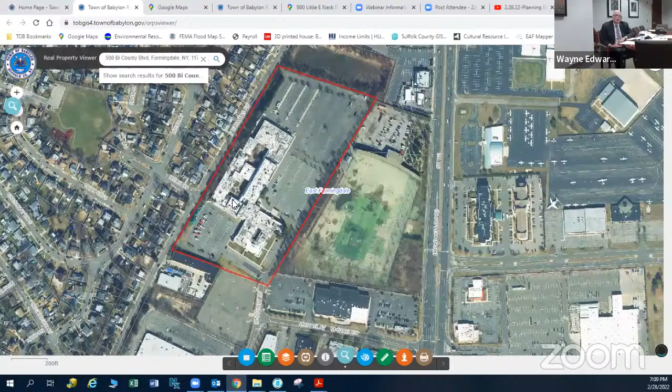Bi-County Boulevard parallels Route 110. Between Route 110 and my client's building is the movie theater, as well as Floor & Decor and several pad sites. On the other side of Route 110 is the Walmart Supercenter and Republic Airport.

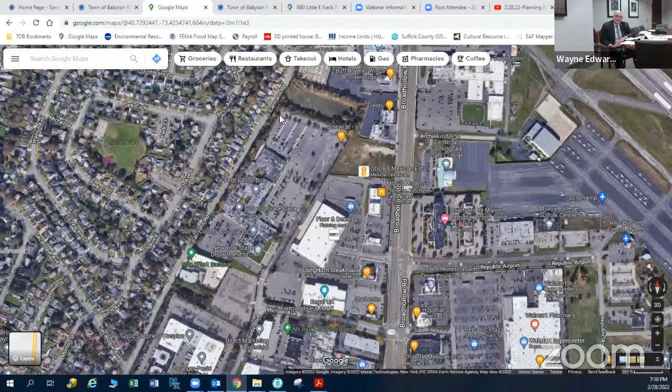As a result, if this board approves that building, there will be no changes to that. There will be no change of entry regarding from Bi-County Boulevard, nor from Carmans Road. The only way you can access Carmans Road from this site are 2 gates. One to the north is a crash gate, and the other to the south is a locked gate, which is locked as a result of the agreement when the Kiddie Academy was granted.

During my client's ownership of the building, it was clearly noticeable that there was a significant number of empty spaces and the building was overparked. My client did a similar project at 999 Stewart Avenue, which is a 200,000 square foot office building.

They built behind it a CubeSmart, similar to what they're applying for here. Across the street was the old Grumman site. It's an industrial area. Across Stewart Avenue from that area is also residential properties.

Currently, my client leases the northeast corner of the building. If you go down there and visit, the New York State Department of Transportation operates the commercial truck licensing test site in the area. The area is fenced off.

If you want to obtain a New York State Class A license to drive a tractor trailer or a larger truck or bus, you have to come to the site and take driving tests. It has to comply with federal regulations as well in order to get a CDL, or commercial driver's license.

Inasmuch as the parking lots are underutilized, and to monetize their investment in the property but not intensify the parking or the traffic on the site or off the site, the best use for this is a self-storage facility.

Site plans were submitted to the Department of Planning. The process started approximately 2020. Plans were reviewed, comments from the planning department were received by my client's consultant, and modifications were made to the plans.

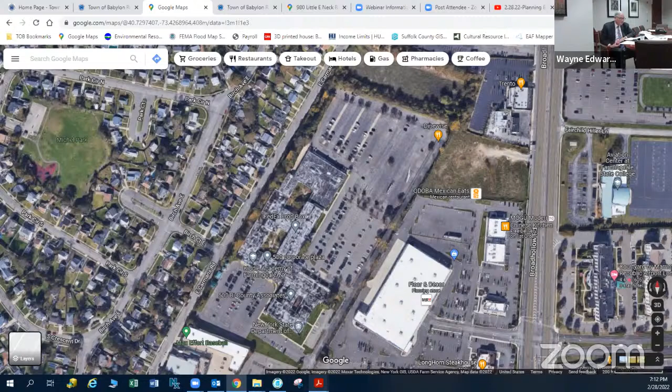Starting with the self-storage facility, it will be a 3-story building set on 2.84 acres. There is no basement, there are no windows, and it's not a 24-hour operation. It will have 20 parking spaces when 58 are required.

Thus, if the board should approve the application, a parking variance will be necessary from the Board of Zoning Appeals of the town. In addition, in the industrial G zone, the height for self-storage is limited to 25 feet and 2 stories. My client is requesting 33.5 feet with projections extending beyond that, to accommodate the bulkhead for stairs and to add architectural details. A height variance and number-of-stories variance will also be required from the Board of Zoning Appeals.

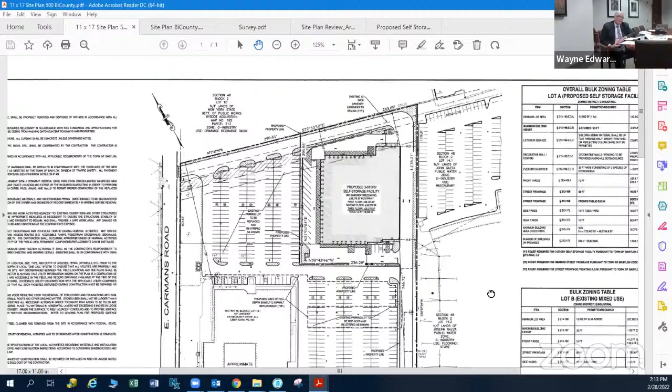As a result of taking parking spaces away from the existing office building, the office building parking spaces will be reduced to 686 spaces when 829 are required. So that will need a parking variance as well.

Cameron has reviewed the parking requirements for each building, and the plans for parking were analyzed for circulation of fire trucks, garbage trucks, and so on. They found that parking was going to be provided for both uses, with adequate parking as well as ADA parking.

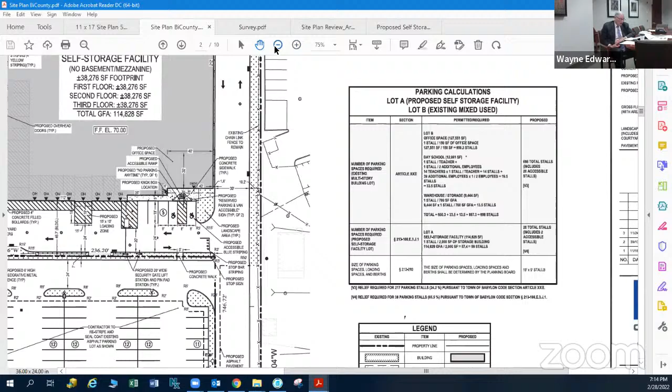Regarding the height variance for the storage building, the highest point will be 42 feet, which is the stair tower in the self-storage building. Self-storage in the G zone is limited to 25 feet, though 35 feet is permitted in the G zone. So if this wasn't a self-storage facility and was just a plain warehouse, we wouldn't be seeking a height variance.

You will note from the renderings that were issued, the town made comments regarding elevations, and my client agreed to provide more architectural detail and change the color. Normally a self-storage building has pretty plain walls; this will look less industrial, and our architect will describe that in more detail.

We have Mr. Frank Ralph, who has testified before this board on many occasions regarding self-storage. He designed the facade and will describe the design of the building as well as the operation of the proposed self-storage facility. After you hear from Mr. Frank Ralph, you'll note that every effort has been made to meet the comments made by the planning department and the town consultants.

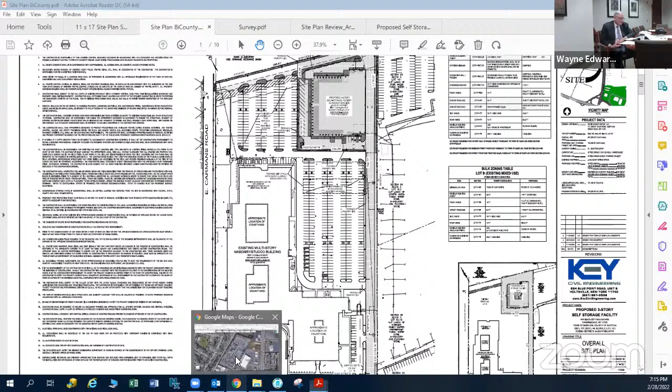We generally don't think of self-storage as an economic generator. These facilities were always thought of as a place where homeowners put extra furniture if they were in between houses, storing their furniture and goods. But actually, most of the users are tradespeople, retail stores, and other entrepreneurs who want to hold equipment, inventory, and display items so they can keep them in a safe, accessible place without paying rents for a larger floor space than they really need.

In addition, this is a win-win situation for both the developer and the town. It will increase the tax base for the town without any impact on the town, the county, or the school district. It basically doesn't use any services at all, and it's not sending any kids to school. There's also a plus for the town in that there's no application for a PILOT agreement.

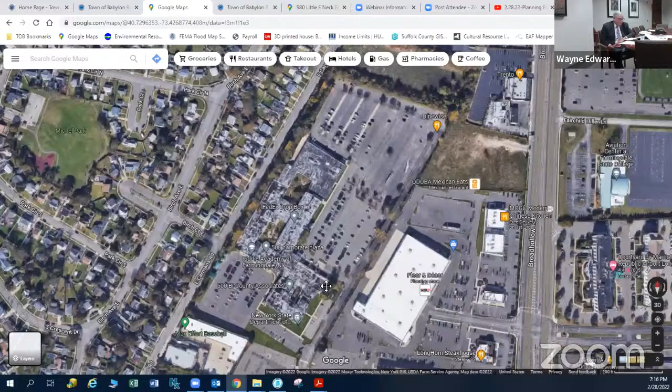At this time, I'd like to call Mr. Frank Relf. I also have Mark Patillo of Key Civil Engineering after that to answer any questions you might have. So, Mr. Relf, can you give your testimony, please?

Why don't you bring the architect? Let's get him on the screen.

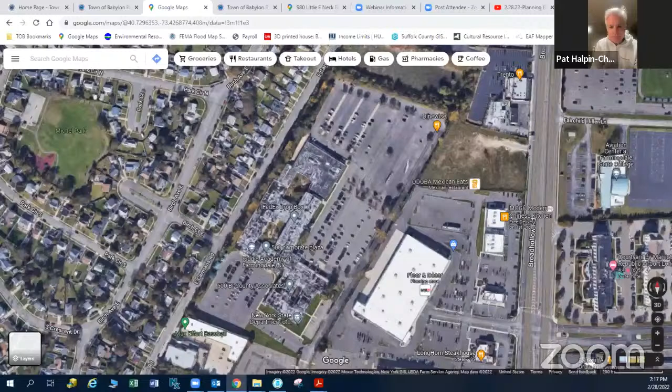My name is Frank Relf. I am the architect. My office is located at 35 Pine Lawn Road, Suite 207 West in Melville.

Okay, I have to swear you in, sir. Could you raise your right hand? Do you swear to tell the truth, the whole truth, and nothing but the truth? I do. Okay, please proceed. Thank you.

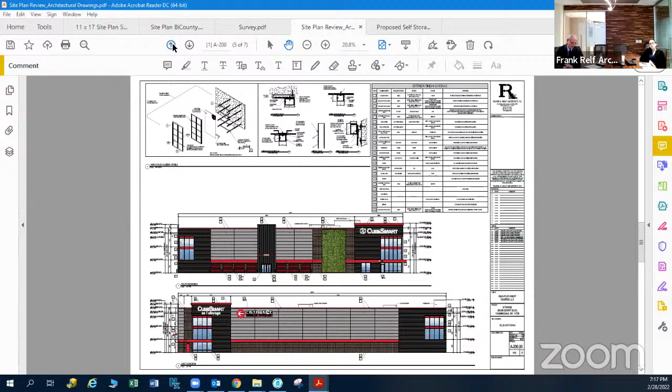Our proposed self-storage facility, as Wayne described, is 3 stories in height. The typical floor heights from floor to floor are 10 feet 6 inches, and we have a 3-foot high parapet wall, which brings our height to 32 feet 5.5 inches to the top of the roof deck, and to the top of our parapet is roughly 36 feet. That's the majority of our building and the bulk that you would see.

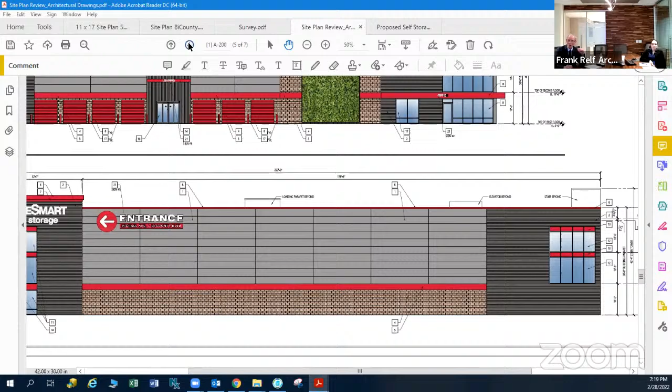Where we exceed 35 feet is a very small section of wall at our loading areas and at our stair towers—a very small percentage of the overall height when you look at our elevation. The majority of the building tops out at 36 feet, and the stairwell area and a bit of the parapet is what exceeds that average height. So although we're asking for a height variance at 42 feet, that's only for the stair tower itself; the majority of the building is at 36 feet as our overall height.

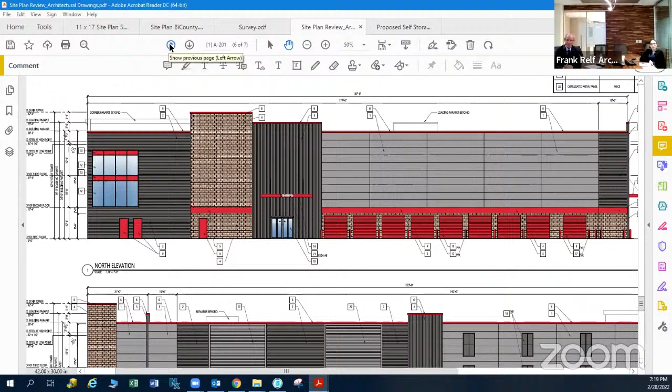The building is a mixture of materials. We have insulated metal panel that is predominantly the light gray and darker gray, and the brownish tone is all of the masonry. The ground floor is primarily a textured concrete block.

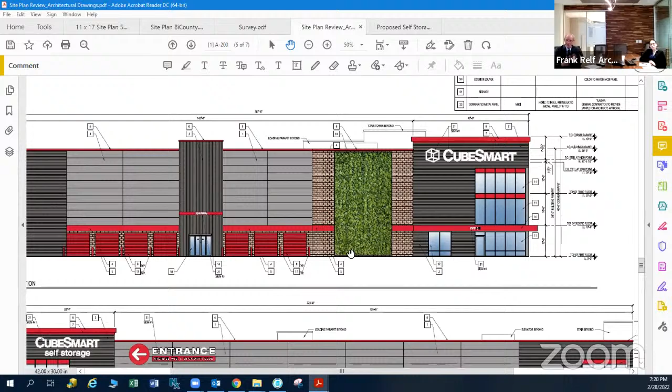That same concrete block is also being used for our stair towers and elevator shafts on the building. We are adding a green wall because that's basically our front elevation as you're coming into the site and driving down the driveway to get to where the building is on the north end, so you have that visibility coming into the site, and it's an enhancement of the overall look.

It would be not a living wall, but a foam wall of planted materials that will be forever, let's say, in bloom or green, as opposed to something that would require quite a bit of maintenance.

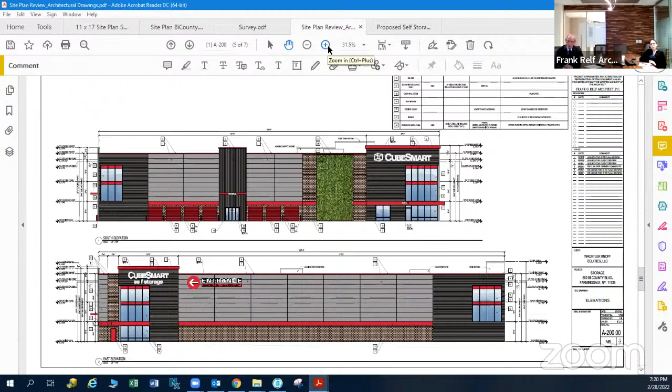On the west elevation, what we've done is try to create a little bit more of a residential feel by adding the faux windows. Would you go down on the screen, please, Matt?

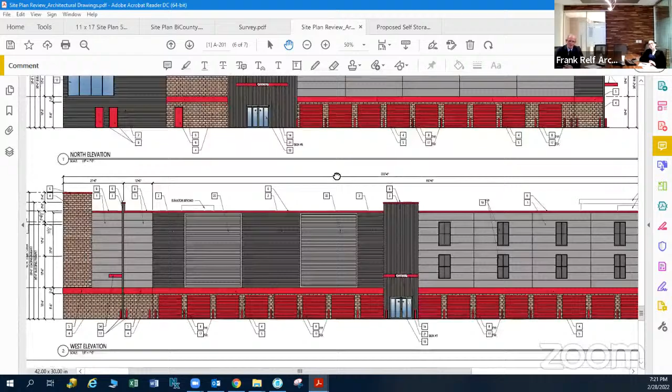It's the elevation below this, the west elevation. Thank you. So there we have, at ground level, exterior drive-up units that would be hard to see because of the extensive amount of landscaping. The windows you see in that gray area are to at least give some of a residential feel.

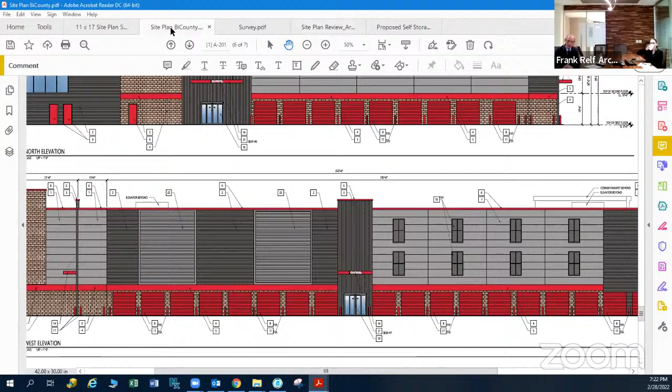What you're seeing in the middle area is also where we have one of the entrances into the building, and typically that's done via a keypad controlled door at that opening. All of the access is done through an access control system where people would use a code that would allow them to access their unit or get into the building during normal operating hours.

Matt, you probably want to pull up C6 of Mark's drawings.

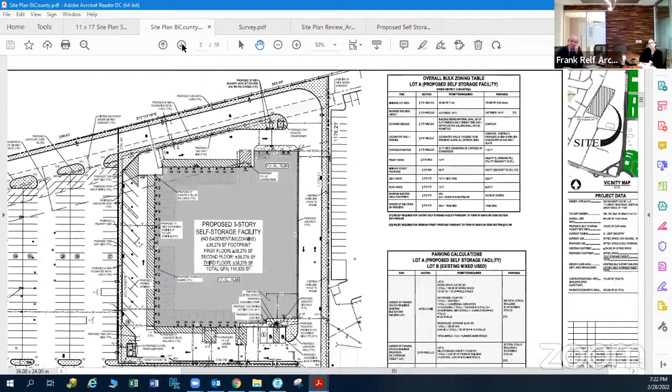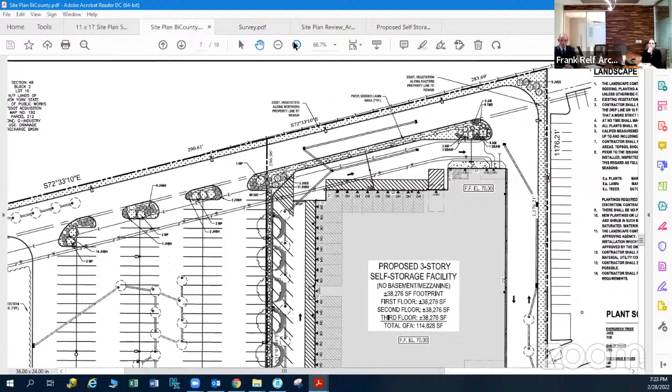I'll let Mark Bellata do all of the detail and description, but along the west property line of the self-storage development, there's going to be a considerable amount of landscaping, and those trees will eventually grow tall enough to provide some additional landscape screening and buffering along that west elevation.

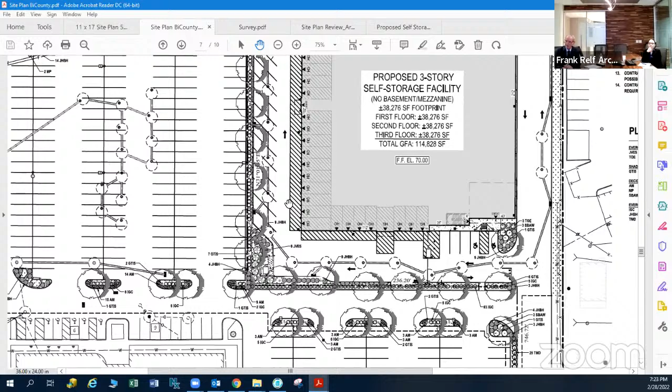There will also be additional landscaping and screening on the south side of the building as you're coming in, but that's primarily for the beauty of the landscaping, and maybe the tenants in the office building will have the benefit of that landscaping. But certainly this has been a request of the planning department relative to landscaping, and we have responded accordingly. If you go back to the exterior elevations, I should explain the east elevation.

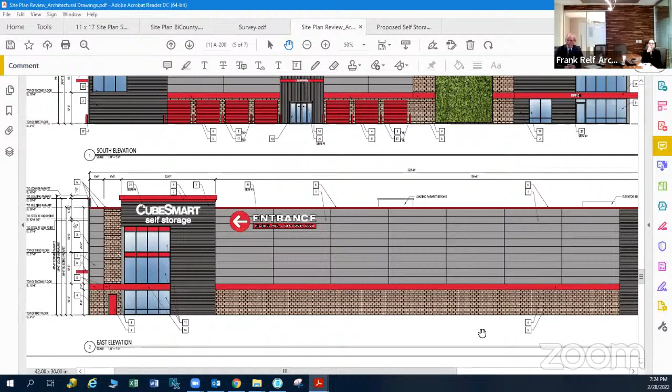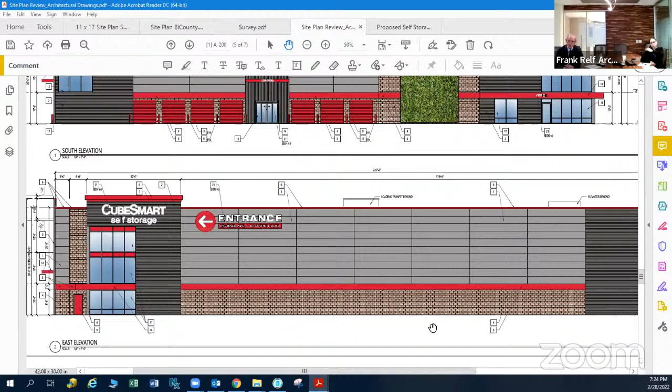So the east elevation, or the drawing on the lower part of the screen, is what may potentially be seen from 110. However, once the hotel goes in on the vacant portion of land, whether it's a hotel or other development, they're allowed more than 4 stories in height, so you basically will never see the building from 110 and barely see it from any other roadway because of its location on the site.

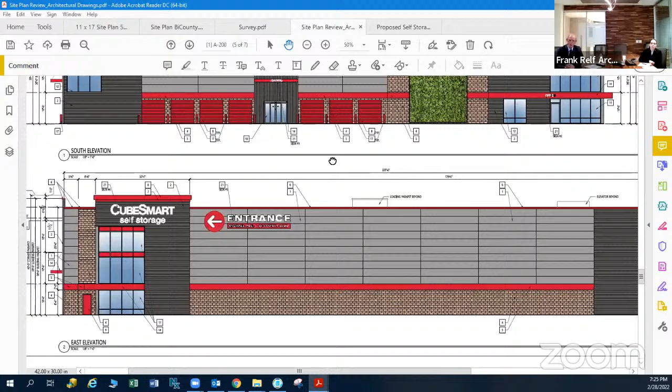We are trying to indicate to people that to get to our facility, they basically have to come around onto Michaels and then BiCounty in order to get to the facility itself, which is why we have entrance and the arrow, because if people are trying to get to the facility for the first time, we're hoping there'd be some visibility on 110 in order to direct people to come down and around to get in.

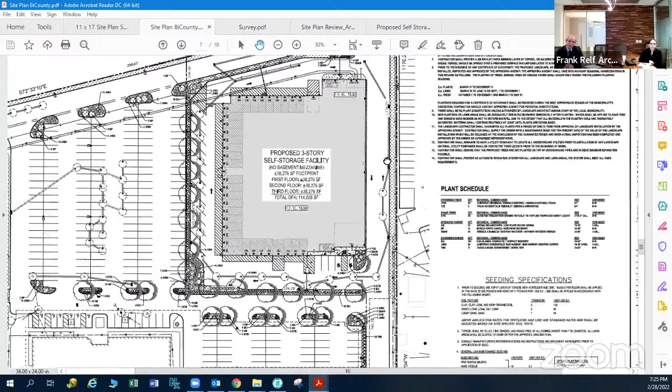So if you were to go back to the site drawing, I'd like to point out that there's a considerable amount of existing vegetation on the west property line, which abuts the neighboring residential.

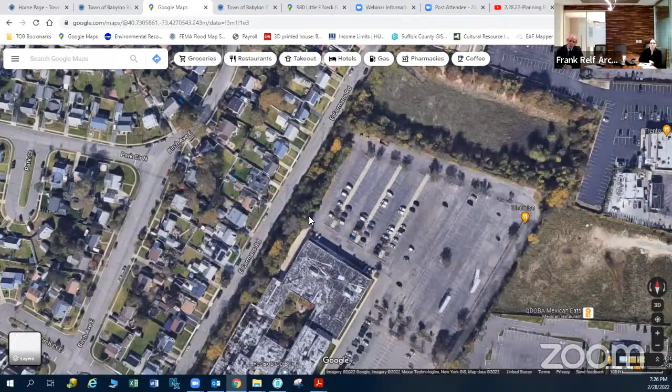Not particularly on this drawing can you see that, but again, I'll let Mark attest to that. There you go, thank you. So that vegetation is very dense, and roughly at least 2 stories in height. The only clear area in that vegetation is by the crash gate.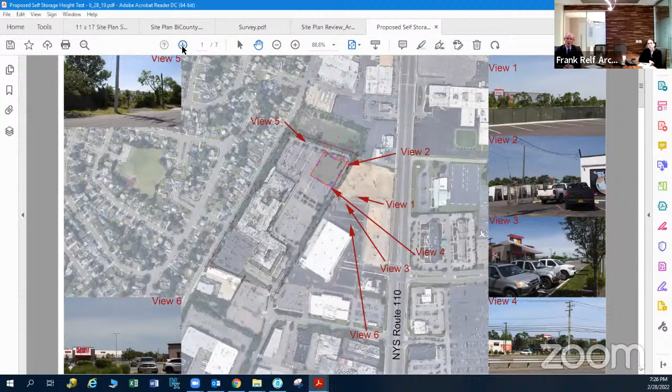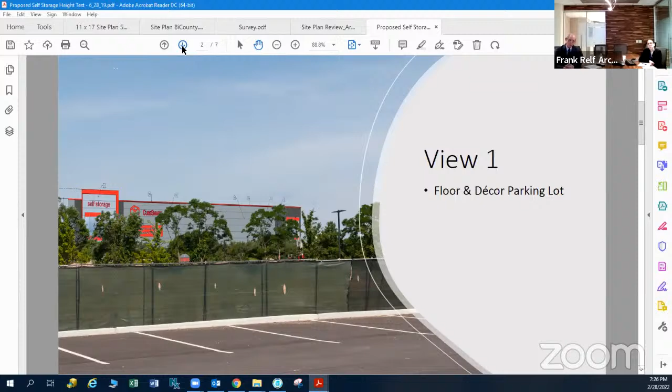Thank you, Matt. So this compilation of photographs and view angles is to give you an idea of the current conditions on the site and the ability to see that from the various views. Obviously, we kind of superimposed our proposed building in the background, just to give you a general idea.

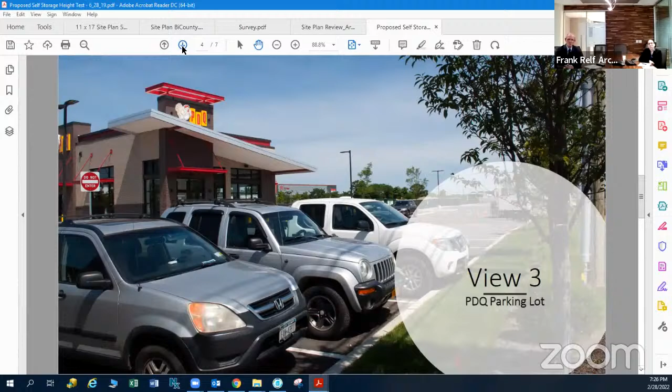So you can barely see the building. This is what the residents see currently, and that's the first street on the northern end. So from street view, you'd probably never see the building, and maybe if you're in a second floor bedroom, you might, with the current landscaping that's along East Carmans Road.

Our proposed landscaping will further buffer the building from view. You'll have the current landscaping, but we are supplementing it with substantial landscaping close to the building.

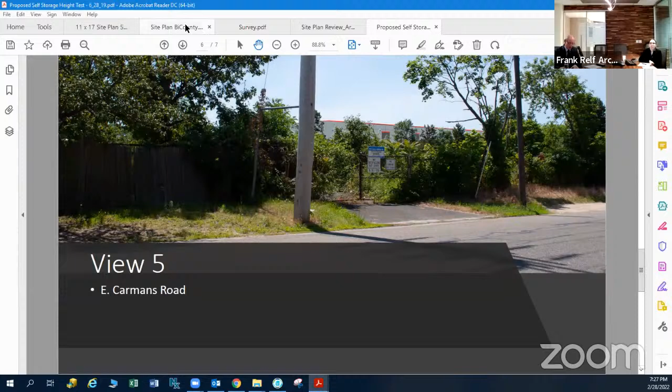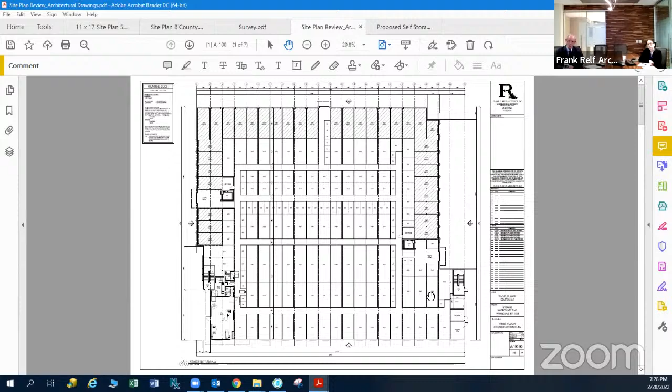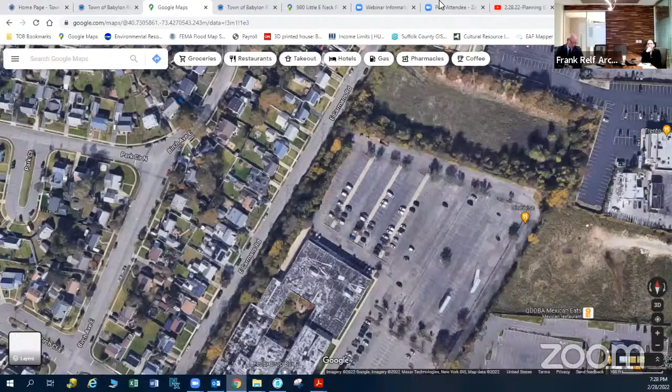The building itself has a floor plate of 38,275 square feet. The floor plans vary, but the footprint stays the same. We offer various different size units throughout the building, depending on individual needs. The building will be fully fire alarm equipped and meets all current New York State building codes, the energy code, and code in terms of building code compliance.

Is there anything else you'd like to add, sir? I think I'm done with my description of the building, unless you have any specific questions. There may be some questions from the board at this time for you.

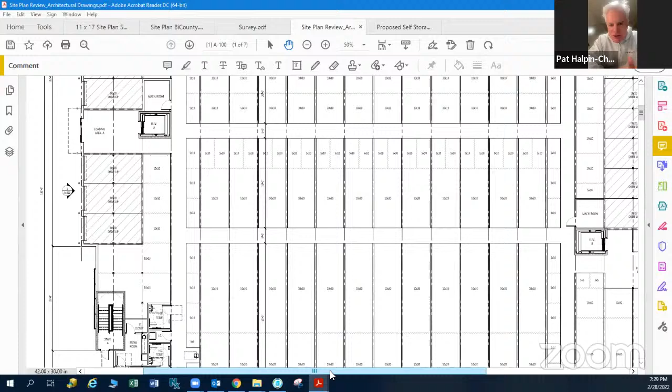Are there any questions from any of the members of the board regarding the presentation just made by the architect? Jerry O'Neill, do you have any questions or comments? No, I guess I don't have a question, I have a comment.

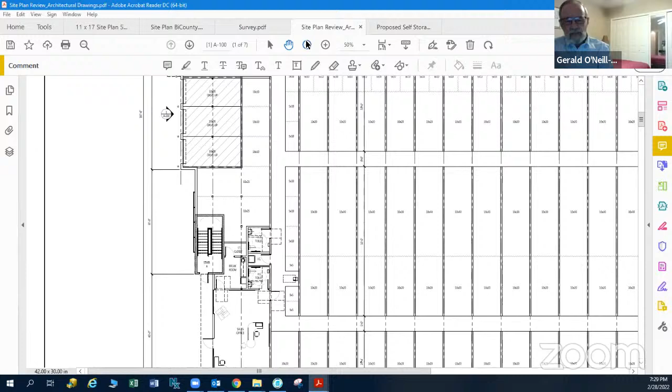I appreciate the effort that was put into the west side of the building and the property, with the additional landscaping and the various elevation elements on the building, including some of those faux windows. It doesn't look like a big warehouse as much as it could have. If I recall, the elevation of that property is several feet above the elevation of the road on East Carmans, so I think this property is higher than East Carmans Road. So once again, I appreciate the effort to make this more attractive for the residents on East Carmans Road.

Sir, do you want to comment on the Carmans Road side? I know you covered that in your presentation. Mr. Chairman? Yes, sir, this is Wayne Edwards. I'll make a comment regarding that. Like the member observed, a lot of effort was done in terms of making the Carmans Road side the nicest side and making it look more residential.

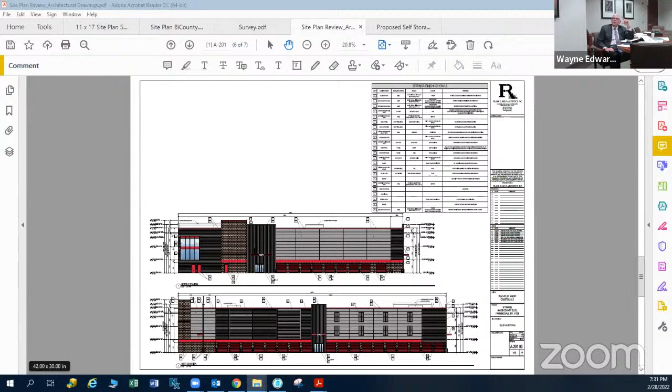I should also point out the pictures and views were done very early in this application, and the building used in those renderings was probably around 5 feet higher than what's proposed. So it's even less than what was shown in those pictures, because that building was probably around 41 feet high, and we brought it down as a result of consultations with the planning department to a lesser height. Every effort, as I indicated, with the landscaping, was done to soften the view from Carmans Road, and it won't really be noticeable at all. It's in the northeast corner, as far away as anybody.

Okay, thank you for bringing that to our attention regarding the change that happened — you worked with the planning staff on the height. Is there anyone else who has a question or a comment?

Chairman? Yes, hi. Because they mentioned the DOT truck CDL license testing on the plan, is that building going to affect that DOT truck site? Yes, it won't be there anymore, it'll be gone. So any noise you got from tractor trailers or from the testing going on is going to disappear. Okay, all right, thank you.

Are there any other questions? Julianne, did I see your hand up? Yes, I apologize, I'm having video issues tonight, so I've been able to hear everything, although you're not seeing me all the time. What exactly are the hours of operation again, please? Typical hours of operation are 9 to 7, Monday to Friday, Saturday 8 to 6, and Sunday 10 to 5. Those are typical operating hours.

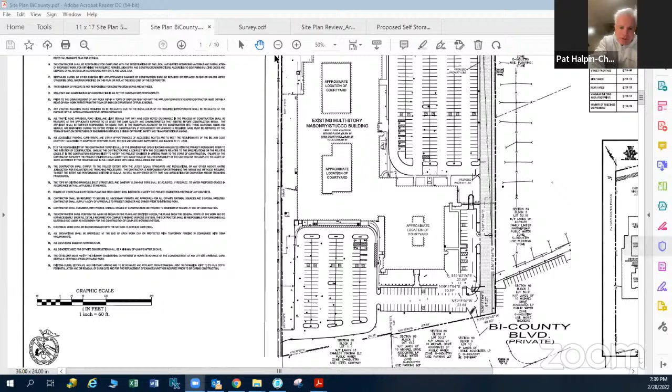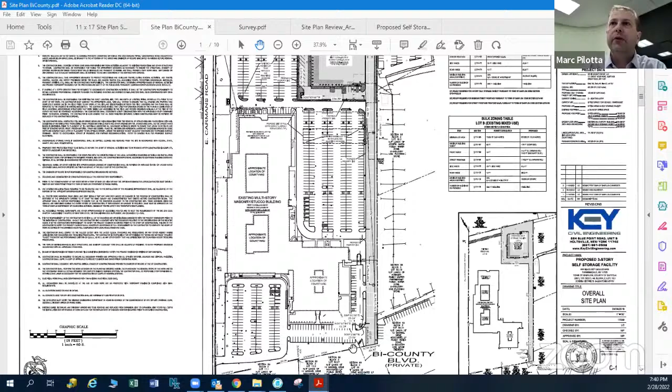So as previously stated, we're looking to subdivide approximately a 2.8 acre parcel at the northeast corner of the property, within the existing office complex, which is a multi-tenant facility. This back area was entirely asphalted with a few minor landscape islands and really underutilized, so this was the best area for this development.

In locating the building in that area, it forced us to realign some of the parking. We maintained the buffer to the east, near East Carmans Road and near the residence. That is approximately a 52 foot buffer with existing mature vegetation there, which will be maintained. We also maintained the roadway around the building.

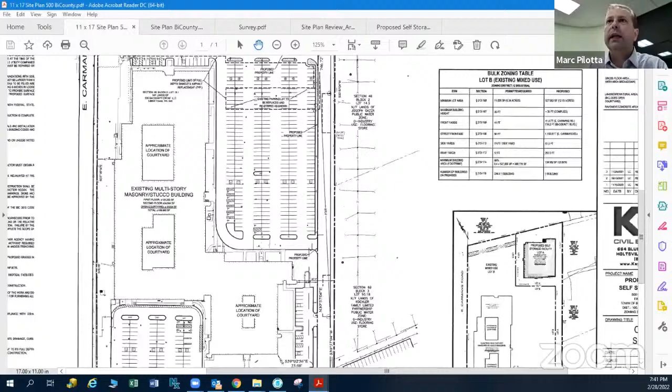And in answering the question that was asked before, it is the intention to have a cross-access easement for vehicles as well as for any utilities that may be necessary. You can see that there, Matt's pointing that out. So you would come in down that main road on the east side, and you'd be able to drive around the entire facility should you desire.

So in realigning this, we also added a number of landscape islands to the office parking area located on the west side. You can see we increased those islands as well as added a few that weren't there previously. In working with planning staff, they were adamant about having a pretty substantial buffer around the facility, so that's what we've done.

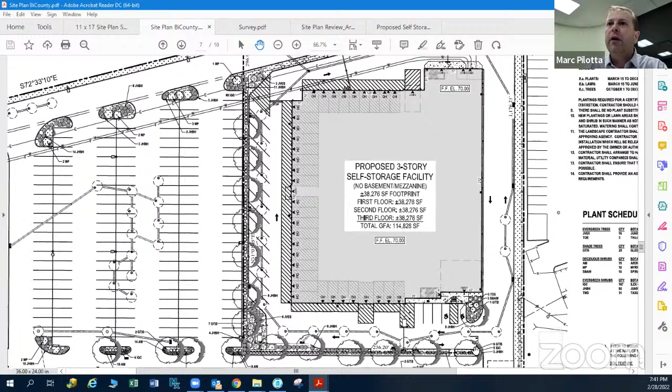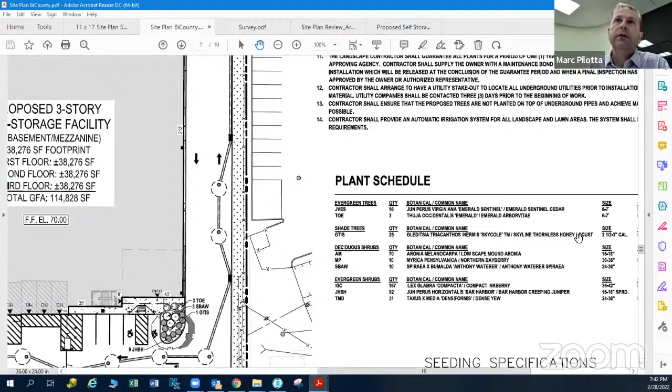Those larger circles are trees. They are skyline thornless honey locusts, which are very fast growing, reaching a mature height of approximately 50 feet and growing about 2 feet a year. The intent is that when fully mature they will add additional screening. I don't know if it's a full buffer, since they lose their leaves in winter, but they will help break up the facade of the proposed self-storage.

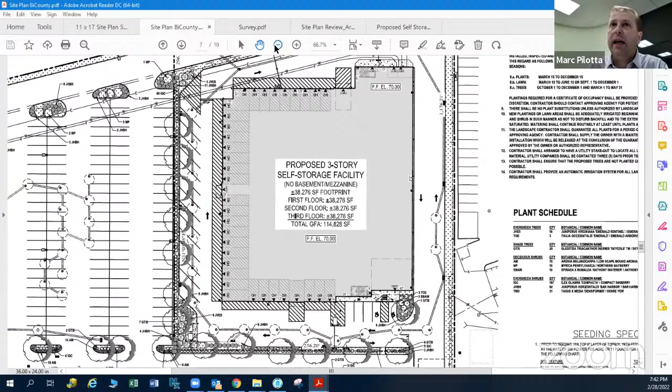Other than that, it's pretty much staying the same. We're increasing some of the drainage to the facility, and obviously we'll have to bring utilities to the proposed building. That's pretty much all we're doing to this site.

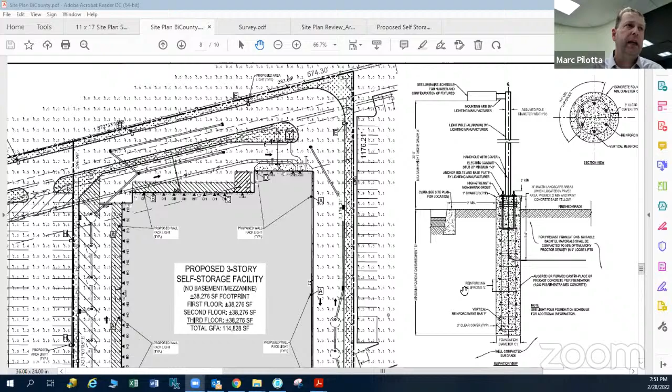Yes, I'll take that one, Frank. We are proposing some new lighting around the proposed self-storage facility, as well as some upgrades to the office parking lot on the north side. The tallest pole is all within town guidelines - it's 20 feet. Most of the others are probably around 16 to 18 feet in height. And the fixture color is 3000 Kelvin, which is on the warmer side of the light spectrum. I recognize the neighbor's concern with colder temperatures - this will be on the warmer temperature side.

And that means what, for the record? That means, for the record, it feels warmer, as opposed to the cold white of the LED. It has nothing to do with illuminance - it's just how your eye perceives the light.

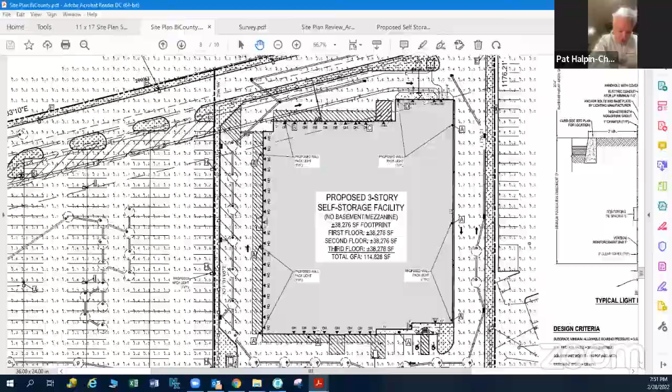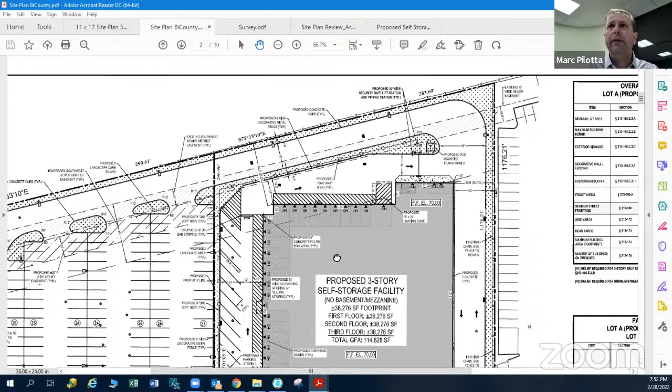Okay, and the residents asked about a gate. There is a gate - if you could go to the site plan, Matt. There is a gate, so basically you could only pull into the first couple of stalls near the office, and then there's a slide gate at the front by the office, right there.

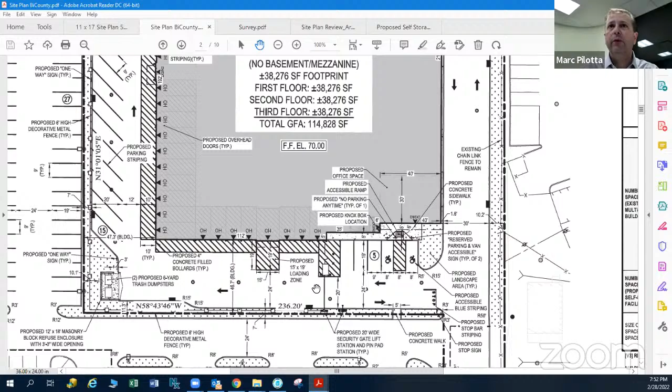So you can see there's the proposed security gate. The site has a 6-foot high fence around it, in addition to the landscaping. It's one-way flow around, and when you get to the back, there's another gate.

Okay, and the last point had to do with the parking for the existing office building with reduction in parking. Can one of the people speak? I can touch on that too, Mr. Chairman. Currently there's 926 stalls at the facility.

The office will have 686 stalls, and the self-storage will have 20 stalls. Mr. Chairman, in terms of the parking, as I indicated in the presentation, Cameron, the town's traffic consultant, did a study and indicated that with the 686 spaces, it would be more than adequate to handle the existing office space, and that the 20 spaces would be more than adequate to handle the self-storage.

In addition, the plan that Mark was referring to was a photometric plan. Looking at the photometric plan, which is C7, you'll notice that there are a bunch of zeros on the west side of the property, excuse me, on Carmans Road. They all indicate 0, so the whole system is designed so there'll be no light spillage onto Carmans Road and along that boundary line.

Okay, thank you very much. Mr. Iannone, is there any other point you want to make regarding the application?

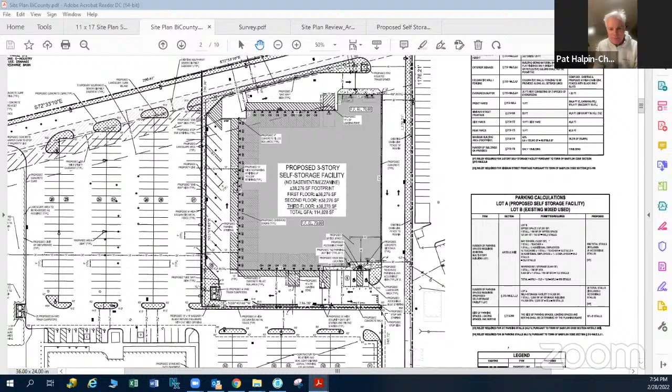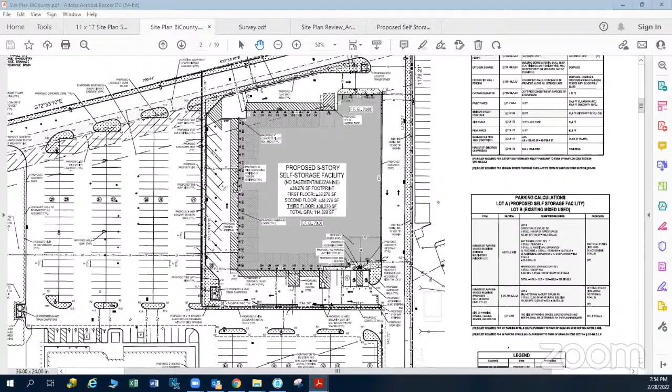In addition to what I wrote, some of the things I caught from the presentation: how much additional traffic is going to end up spilling out onto Bi-County Boulevard and Route 109, as most self-storage facilities house landscapers and operations that start very early in the morning. That's why I asked what the hours of operation are.

All right, any other questions? View number 5 that the applicant sent you is not a direct look into the lot, but instead is off, like an off corner.

If you look at the pictures I had sent you, I took a couple directly into the lot. The crash gate on the north side of Carmans Road, part of the County presentation letter I sent you, actually has some sort of additional greenery installed on top of it, so the neighbors don't have the headlights and operating lights from one of the tenants on that property, which is a PSE&G HVAC type repair, home type repair facility.

The gate looks very poor, and again that's on the County, which I'd like to talk about too. We're only talking about... okay, I just found your correspondence, it was at the bottom. We received it, so we'll look at this very carefully, including the pictures you provided. It looks like there's some outdoor dumping going on there and a variety of other things that haven't been properly maintained.

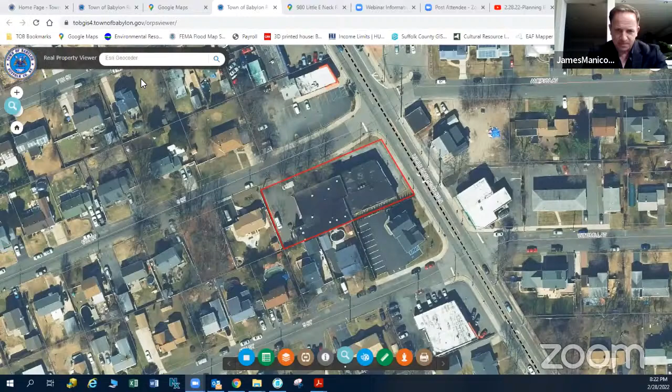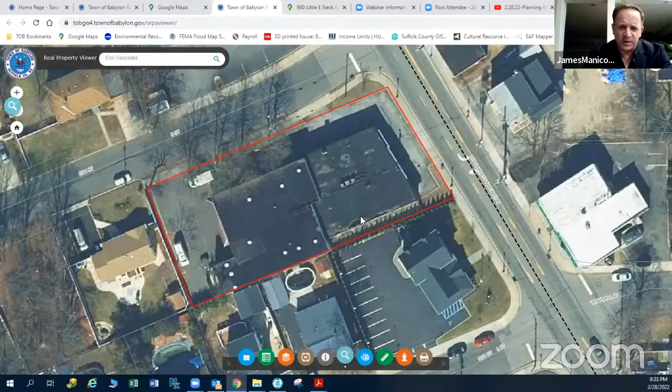So you could clearly see that's the existing building right there. Over the years, while it was a manufacturing facility, I believe it was an ice storage facility. There were a few other uses in there, inconsistent with the zoning, and the building was sold. Mr. Janak bought it and now proposes to renovate the building to not only do an interior alteration, but improve the facade, improve the landscaping, the lighting, make some exterior enhancements that will be consistent with the neighboring uses and the downtown feel that the town is going for along Little East Neck Road.

Could I just jump in there for a moment? I apologize. I should have asked you regarding the memo from the planning department dated February 23rd from the commissioner. Have you had an opportunity to review this with the applicant, and do they have any questions or comments regarding the conditions, the covenants, restrictions? No, Your Honor. No, sir. No, they have none. Yes, we have, and no, they do not. Okay, then. So you have reviewed it, and they have no objections. Yes. Okay, thank you. Please proceed.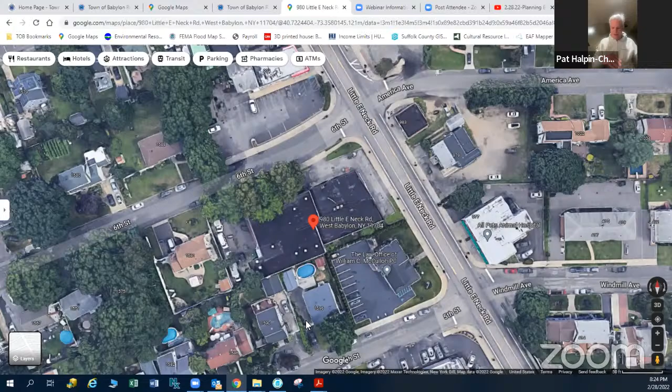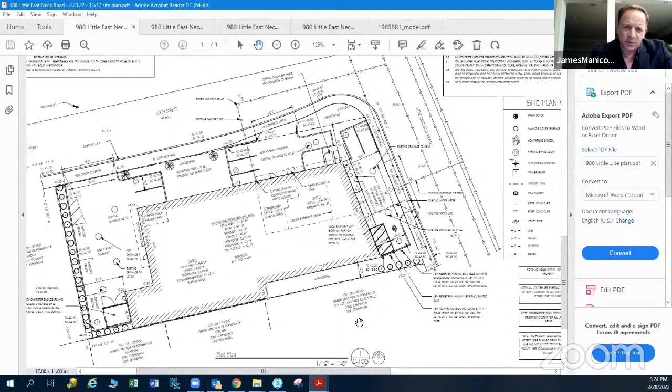So as you can see, the site has spatial constraints for parking and site circulation, but working with planning staff and Rachel, Brian in my office have come up with the most feasible and efficient use of the parking for the site. We're trying to take the original site configuration with the current asphalt and sidewalk and create a site that is more consistent with neighboring parcels that are going to be retail in use. Our client's business is like an electrical showroom, office, and storage.

He does have a single box truck, which he will park inside the building, so that will never be kept outside. And then, as you can see, we are making site plan landscaping improvements, facade improvements, lighting, as well as trying to create as much feasible parking as we can.

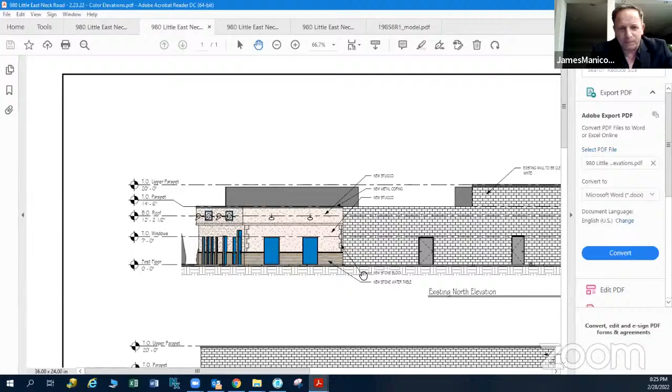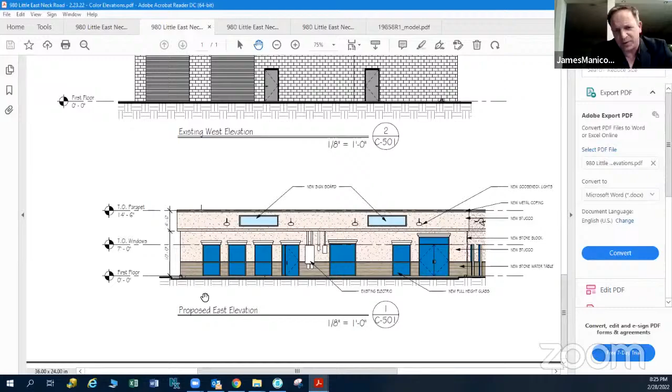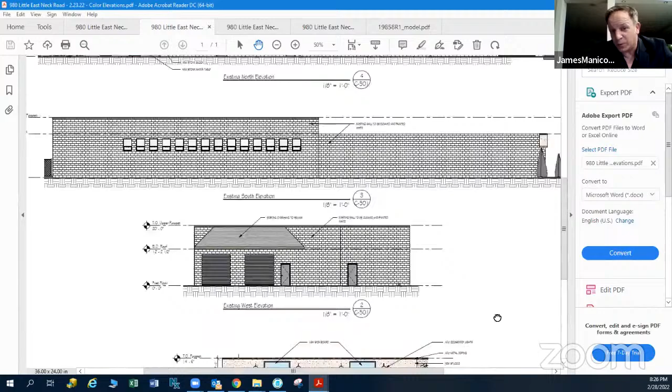In the elevations, the front facade will be redone with stucco. We will redo the windows in the front, as you can see. We will use gooseneck fixtures to create a consistent appearance with the remaining neighbors. And then the back, the side of the building and the rear, we will look to paint the concrete block white. So again, it's going to give the building a much needed facelift while providing a viable owner for the building with a tenant going forward in the future.

Certainly the building is going to be consistent with all town requirements, with the exception of the parking. Lighting is going to be dark sky compliant, so there'll be no light shed on any neighboring properties, as well as keeping the look consistent with other neighboring uses for retail and office space as well.

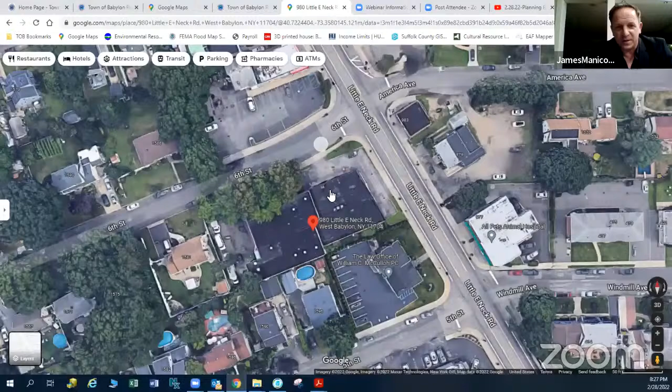To the extent we were able to, street trees, landscaping, new asphalt are provided, and a new refuse enclosure. Our client is very concerned about the appearance of his building. This was a capital investment for him, so he wants to do right by the community as well as his own business. He plans to make the necessary improvements to increase the value of the business and thus increase the value of the homes in the neighboring community.

As you can see in this image, a lot of the landscaping is overgrown. A lot of the branches and trees have actually created a little bit of damage to the building, which he will repair.

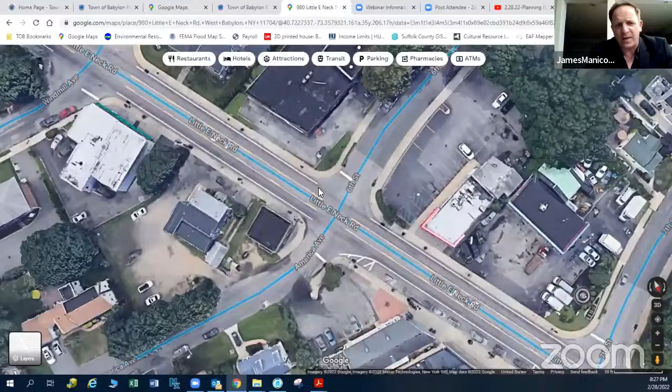At the street line, the sidewalk looks really nice, and he looks to just improve upon that. With the facade enhancements we are looking to do, we're really trying to create something with a very nice community feel. It has retail space in the front, similar to that up and down Little East Neck Road, and we feel it'll be a really good use.

If the board has any questions, I'd be happy to answer them. Okay, thank you very much. Are there any questions from any of the members of the board?

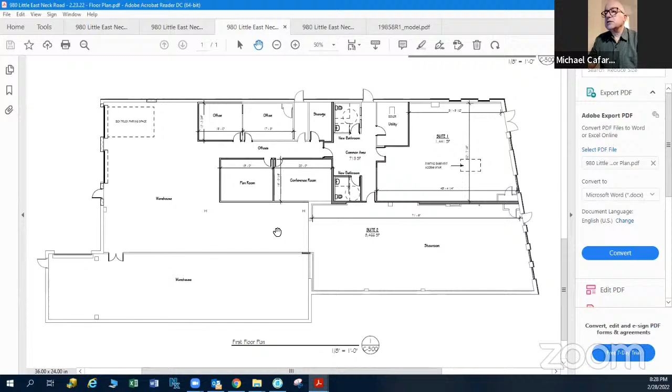I'm just curious, is that first curb cut going to remain the curb cut that's close to the corner? Not the one in the back, but the one right up by the stop sign? Yeah, those curb cuts that are currently there are going to remain because, again, we wanted to provide as much landscaping as we can, which you see on the 6th Street side of the building.

So that gives us the curb cut on the far left side to get the parking and get the truck into the building, so that doesn't remain visible on site. Then we have the other two curb cuts, which literally go to three separate parking areas. The reason we did that is the circulation around the building is a little tight, especially at the corner. So having the three curb cuts that are currently there lead to their own independent parking areas, which creates the least amount of conflict of vehicular movement around the site. We felt, in conjunction with planning staff, that was the proper way to go.

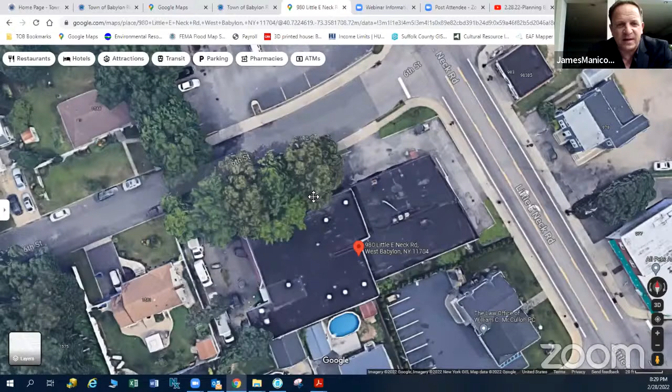I think from the corner it's certainly going to present a really pretty elevation, where the corner of the property has landscaping and minimal parking. Like I said, to the best of our ability, we were able to work out the most amount of parking spaces to meet the town requirements.

Thank you. Are there any other questions? Yes, you mentioned two different uses for the building, a tenant in the back and a tenant in the front. Can you talk about what that might be?

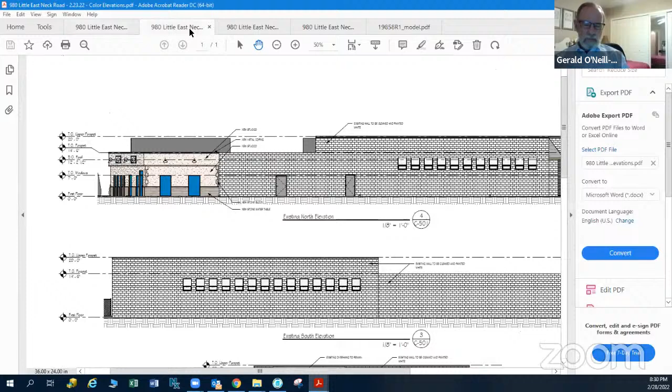Yeah, the applicant, DB Electric, is going to take the back of the building. He is going to have the office space, and he's going to have a showroom in the front, so you'll come in off the street. Then he will have a showroom, office space, and storage. Any material brought in via his box truck will be parked inside the warehouse, in the corner of the drawing. The other tenant will be in the corner, and that'll be a straight-up retail tenant. Both spaces will share a common toilet core in the center, with all proper egress and life safety measures met for code compliance.

So the front of the building on Little East Neck is going to have two storefronts. Yeah, it's going to have, correct - a showroom on the lower section, and a separate tenant in the upper corner. So the applicant will comprise the majority of the building, with one tenant being in the upper right-hand corner. Both the owner and the tenant will share that common toilet core.

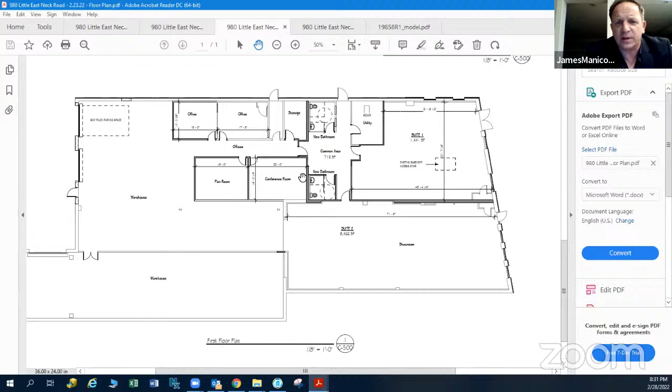And again, for the most part, each will have their own separate - oh, there it is, okay - yeah, they'll have their own separate entry, and for the most part there'll be separate parking as well.

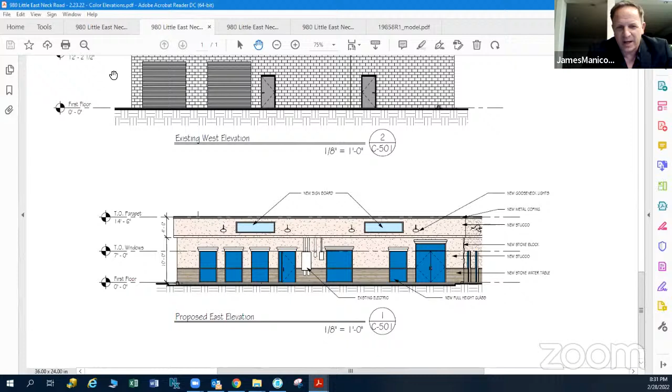So hopefully we've done what we could to mitigate a tight circulation pattern around the building, to provide an enhanced elevation that will serve the community for years to come, while mitigating what could have been possible traffic issues around the building. So we feel that the parking as we designed it works, along with getting the additional landscaping that the site needed.

And the owner is looking to do some enhanced landscaping and get some of the overgrown trees off the building. So the site should have a really nice appearance coming up and down Little East Neck Road. And for the community, certainly with the building getting the upgrades that it needs, it is consistent with the use that is current in the zoning in the town. It certainly looks to enhance the property values all around.

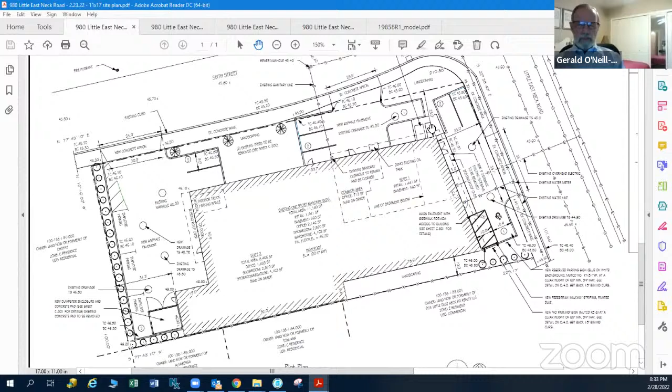So on the west side of the property, those are new plantings alongside the residence. Okay, are there any other questions?

Matthew, are there any residents that would like to address the board regarding this application? There was one member of the public registered to participate tonight, but I do not see them in our waiting room. I'll just remind anyone that they'll have an opportunity to present comments in writing to the planning board. Certainly, if any member of the community has questions, they could call our office directly. We would be happy to answer any questions that they have. Our office number is 631-320-3305. They could either ask for me, James Manicone, or our project manager, Brian Kiefner.